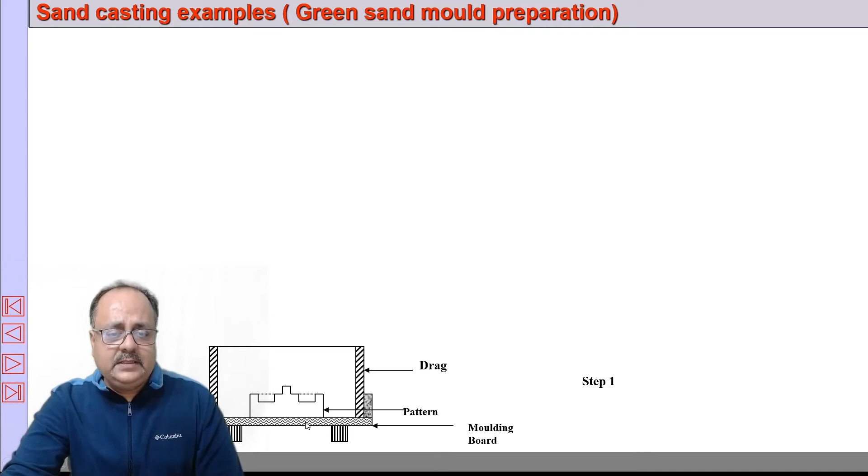Then we apply a certain amount of parting sand on the pattern, so that the pattern does not stick to the molding sand. After parting sand is placed, we fill the portion near it with facing sand. After facing sand is filled, it is backed up with backing sand. Once backed up, another board is placed and the entire thing is rotated.

The pattern is still here, and to the same pattern we fit the cope half, then place the cope half of the flask. We place the riser rod and the sprue rod, then pack it up with molding sand. Then we create some vents.

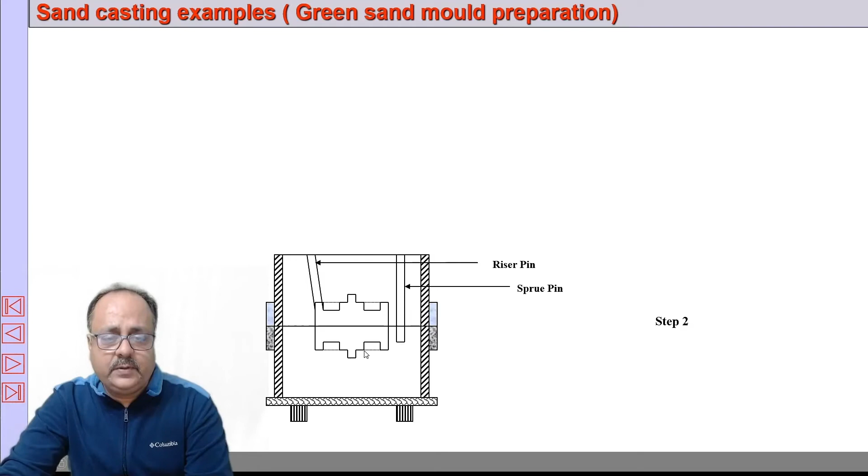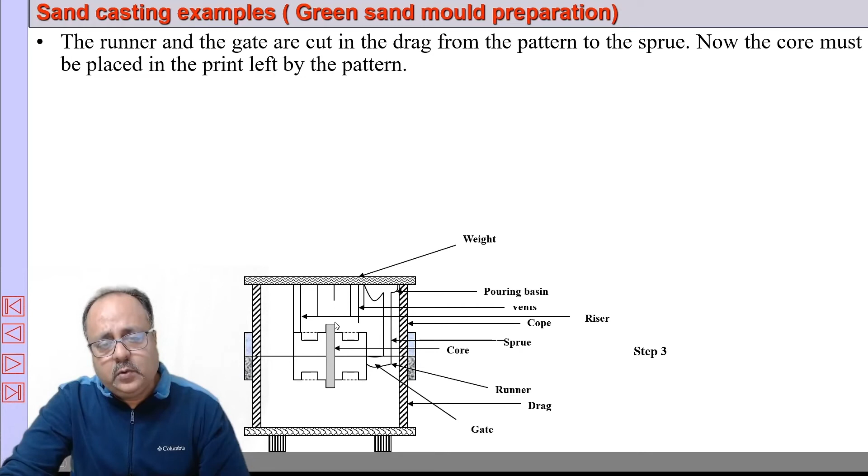We rotate this, the upper part is rotated, and both halves of the pattern are removed. After both patterns are removed, the cope half is assembled. Before that, the runner is made and the pouring basin is also made, and both are assembled. The core is placed in the right position and pouring is done. This is how we carry out the green sand molding process.

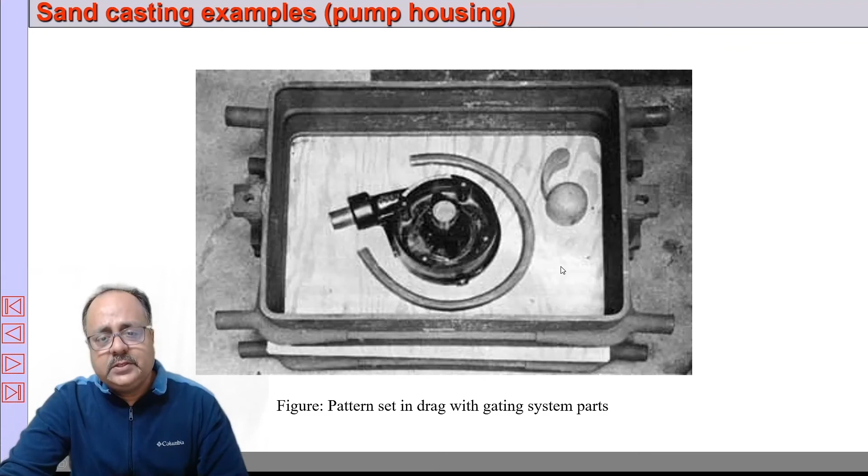Let me start again with an example. You can see this is the pattern, and this is the runner. The runner is placed here, and we use the parting sand, then the facing sand, then scrape off the excess sand.

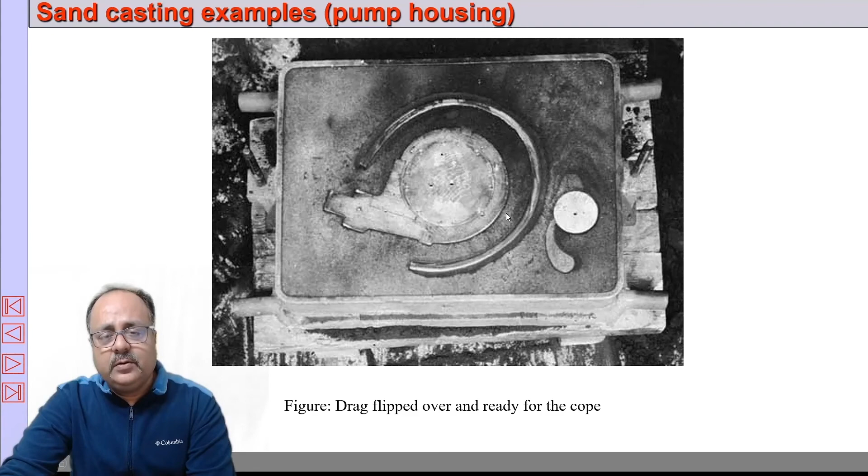Then we rotate and flip it. After flipping, we place the cope half of the pattern on top. This is the cope half, this is the sprue rod, and this is the riser rod, and we pack it up. Then we make vent holes.

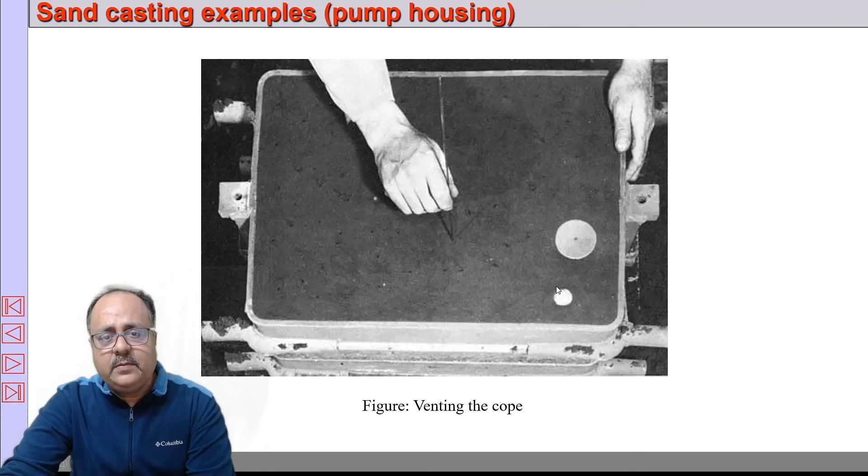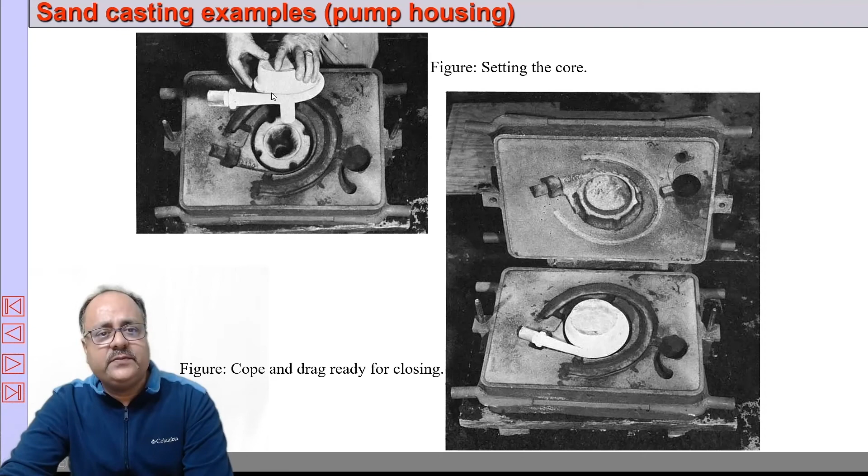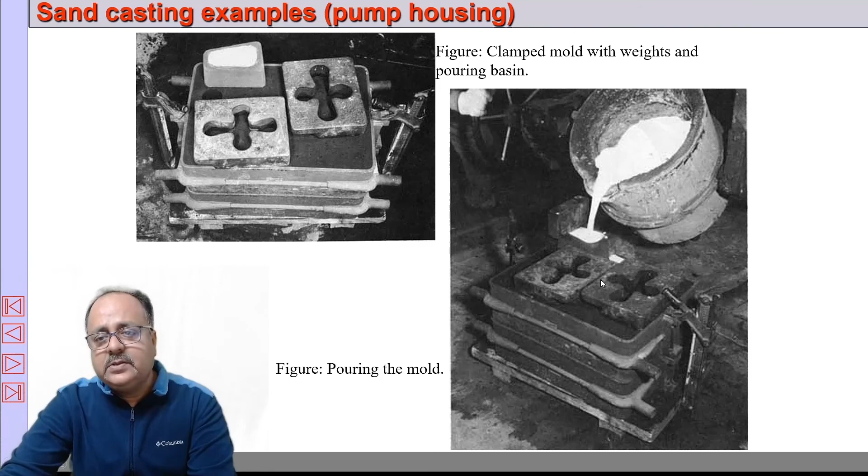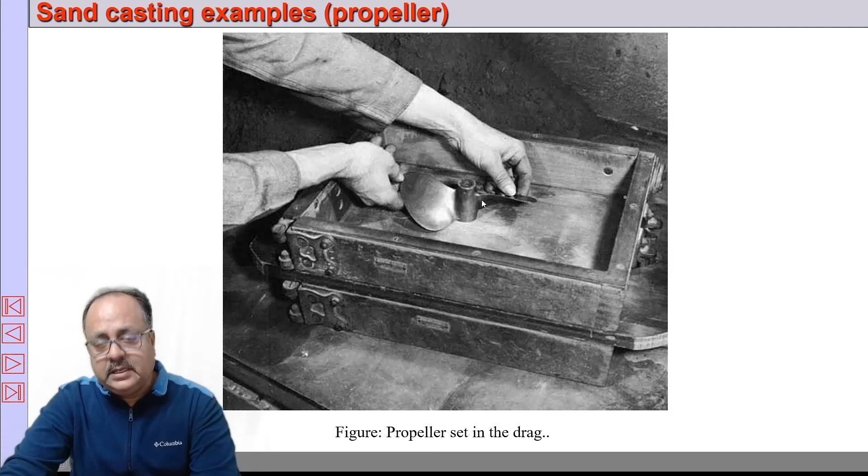This is another example, a popular one. We place the pattern here, then use the parting sand, then the facing sand, then back it up. This is the casting. This is how we prepare green sand molding.